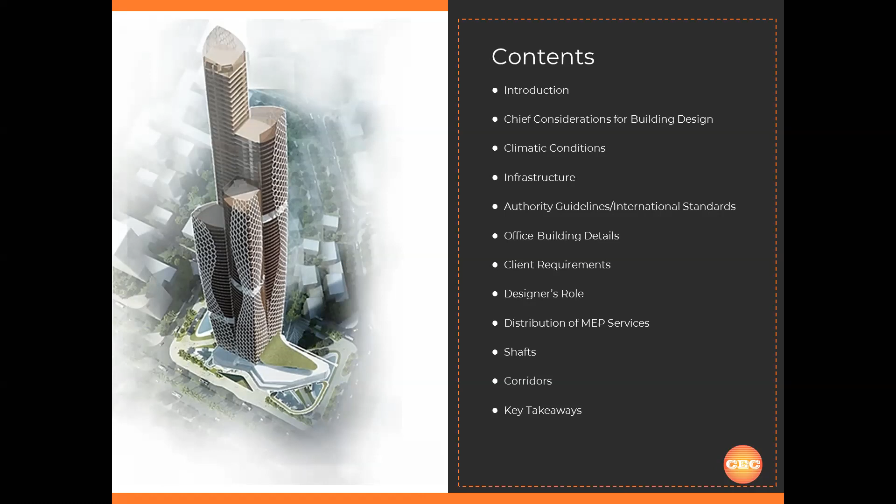MEP will have a vertical distribution, which is floor to floor, and a horizontal distribution, which is from the corridor to individual office spaces. And then a conclusion. So this will be the broad scenario of the whole presentation.

As we are saying, apart from architectural and structural, everything else in MEP is interactive. It is meant to suit the purpose of the occupant and end user. Let it be lighting: if the requirement is detailed work, then we have more lighting. To have comfort for the occupant, we need air conditioning, so the temperature should not be too cold or too uncomfortable. Similarly, we are talking about water supplies. Apart from this, requirements like fire and life safety come into the picture, required for occupant safety in case of any accidents. So all these services are covered as part of MEP.

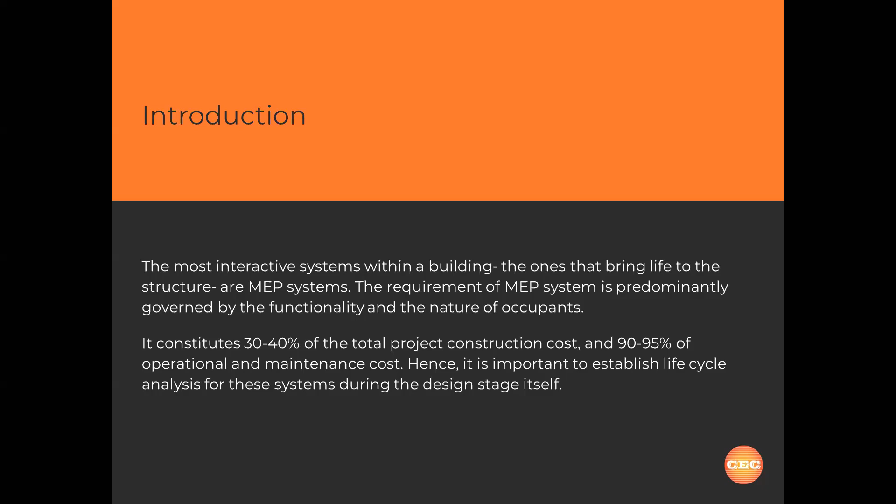By and large, when we evaluate it, MEP contributes about 30 to 40% of the cost of the whole project as the initial cost or cost of construction. When we go further into operation, these costs are about 90 to 95%. So it is important for all stakeholders to understand the selection and implementation of design, how it will work during design and installation, and how it will perform during operation and maintenance. And we are going to cover those aspects one by one as part of the further discussion. As we mentioned, climatic conditions, infrastructure, authority guidelines, and client-specific requirements are the key parameters for the designer's flow.

Taking further to our particular project, Istanbul. Istanbul is just the gateway to Europe. So weather conditions are 28 to 30 degrees centigrade, unlike Dubai, as I was mentioning earlier, where we get temperatures of about 46 to 50 degrees centigrade in the summer. So in such cases, we need AC.

Normally, when we talk air conditioning, we maintain a temperature of about 24 degrees centigrade as a comfortable temperature. So the AC requirement for the offices will be there, which will be required to improve the efficiency of the workers, making them comfortable. But the load or the allocation of AC will be lesser as compared to the Gulf.

Similarly, depending on the latitude and altitude of the site, the orientation of the whole facade will be considered. I believe that's a part of the architectural thing, and you must be looking into it. How can we maximize the sunlight, and how we can create that atmosphere within the spaces. So when we talk about maximizing the daylight, we automatically talk about reducing the artificial dependence on the lighting.

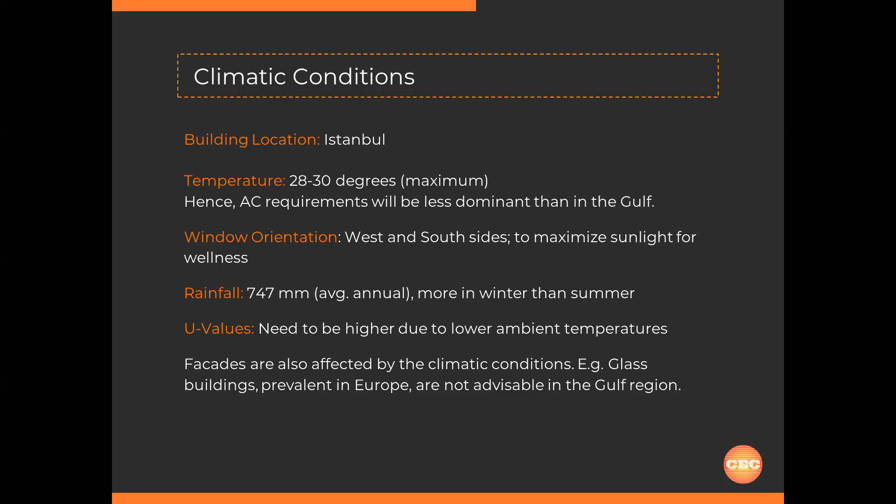Then when we say lighting facades with glass, it also brings the solar energy, which is radiant energy. How can we get more sunlight but less heat? That depends on the selection of the glass. So these are climatic conditions.

At an infrastructure level, how the plot is. Whenever you want to construct the office tower, is it flat? Is it sloping? If it is sloping, then it has to get properly leveled. So plot gradient will come into picture. Allocation of utilities, what sort of infrastructure is available around the plot, from where I am getting the drainage connection, from where I am getting the water supply piping, from where I am getting the telephone lines. So all these things.

In developed countries, there is something called master development. So as a master, each plot is allocated for a specific purpose, and the allocation of services in terms of power, X megawatt, is allocated. So that comes into picture.

Similarly, how much rainwater we can discharge. When there are heavy rains, we cannot flood the infrastructure. So the authorities, the guidelines of the master development, will suggest that we should hold the water for 2-3 hours within the plot and then discharge to the main network to avoid flooding of the spaces. So those norms will come into picture as part of master development.

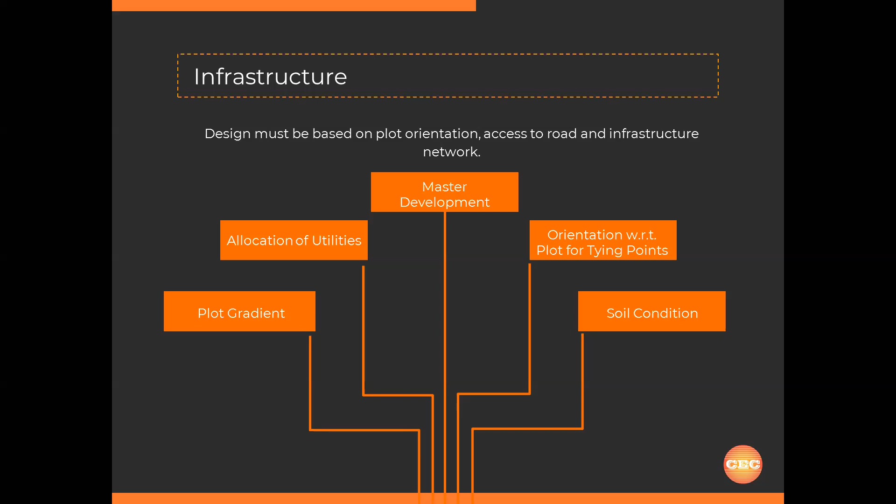Orientation we discussed, and soil condition, very important, how the structure will be there based on soil condition. Again, percolation of rainwater will come into picture. So these are the basic parameters on which the whole design of structure as well as MEP is governed.

Now standards. As we are discussing, for every location we have specific authority guidelines and international standards. So when we are designing, there are four major parameters we work on with the authority. One is authority guidelines and international standards. Second, what is the infrastructure of the authority around the plot? Third, access and safety of maintenance.

At times when we talk about civil defense, they will come and inspect quite regularly for standards. So how they will access, that scenario. If you talk about the power distributor, they have to maintain their transformers and cables, and they do regular inspections. So how can they access the areas?

And the last aspect is billing. The occupants will have two sorts of billing. One is billing from the master developer, and second is from the authorities like electricity and water, as we pay DEWA bills here, as we pay telephone bills here. Similarly, air conditioning is handled at times with district cooling, so those bills come into picture. So these are the aspects we look into when we deal with the authorities.

I just mentioned a few standards which are internationally acceptable for the air conditioning and water supply and the services. I think as a part of architecture, you should just get introduced to it. In-depth analysis of this is not required. But the second part for sure is required for you people, that connectivity to infrastructure. At the end of the day, the building has to function along with the periphery it is built within. So road and access to the roads, service entries are the parts which we'll be discussing as a part of your architectural details.

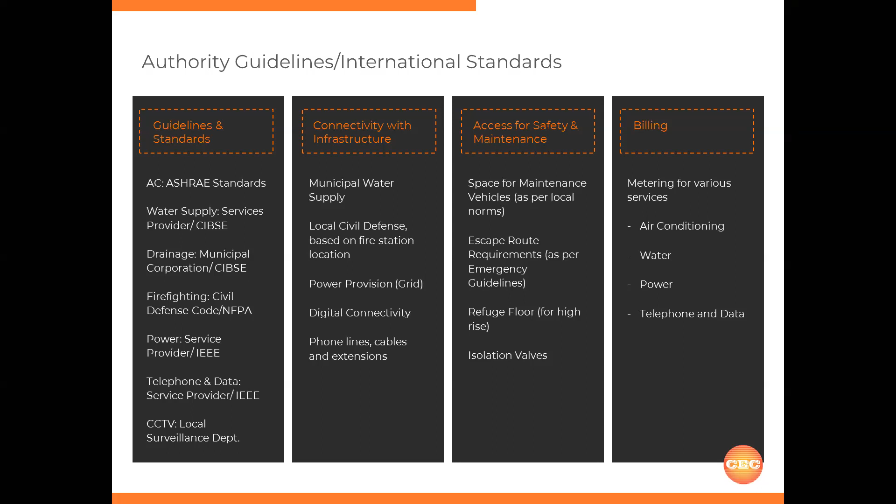Going further, just for example, in the basement we don't provide AC. It is not required because there are no occupants. It's only a car park. So air conditioning will not be applicable. Water supply will not be applicable. But firefighting has to be there. We need to have power supply. Telephone data, we don't have the points, but the network should be there. CCTV is required. So each area of the building is analyzed for the services it needs.

In services design, we get connection from the infrastructure at one certain point, which we call a main center. From that main center, services are distributed to intermediate points, and from there it goes to the end user. How it happens for all services we will go through one by one.

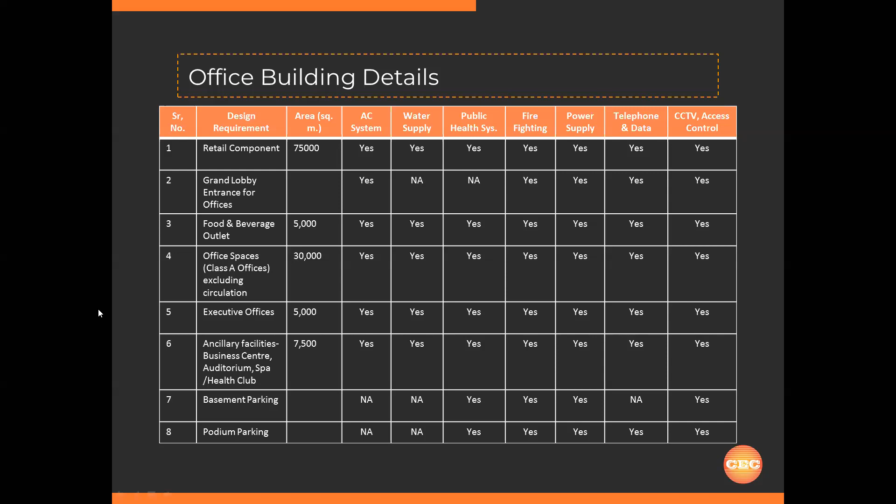When we talk about designing services for a project, these are the few aspects we ask the client. Who is the target customer? Looking at the facade of the building, we analyze this could be a high income group, where we are talking about sophisticated offices. Now, are the offices in sell mode or lease mode?

These differences go with the billing, because in case of lease mode, the tenant is paying for the premises lease, and all common utilities like elevator, corridor air conditioning, maintenance of FMC are loaded on the rentals. So that component has to be evaluated and notified to the building operators, so that the lease of the space is decided accordingly. So we ask fundamentally this question.

Then what is the building height? Normally we keep the pressures in the building less than 10 to 12 bar. Beyond that, it becomes difficult to handle. It's dangerous. So when we say 10 to 12 bar pressure, the height correlates to almost 100 to 120 meters. Now, the notification says that 180 meters is the building height. That means we need to break the pressure.

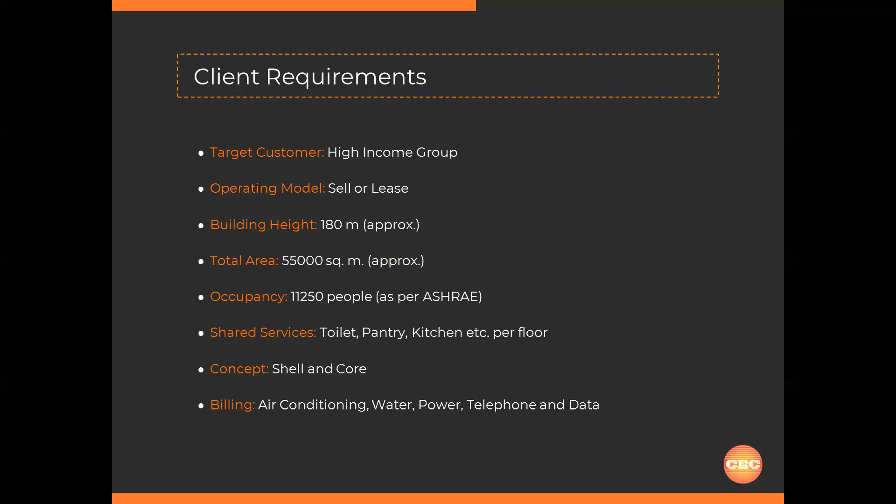Okay. Second aspect is a completely furnished office, where the end user will come and just plug and play. Everything will be available as part of the false ceiling and flooring. Only the loose furniture he will provide as per his requirement. So which route he would like to go as a developer is what we will further discuss.

Again, the client requirements are evaluated, what he needs as services in the building. Standard things, air conditioning, water supply, drainage are the requirements of the end user. Fire protection and fire alarm is by the authorities. Power and telephone data is again for the end user. CCTV and access control can be required either by authority or by surveillance for the safety of the building.

So similarly, we have other aspects. Do you want gas? Is there any specific requirement? Do we have a gym or swimming pool? So those requirements will come into picture. There are standards like well building. I'm not sure we are aware of it now.

As we talk about green building, where we talk about sustainability, there is something called well building standards, where we talk about the comfort, mental happiness of the occupants. So when such things come into picture, they talk about fitness and well-being of the building occupants. In that case, we need to provide the gym facility, rest facilities, the washing facilities or the shower facilities. All these aspects will come into picture. So it all depends what the client is trying to accommodate in the building as a part of standards.

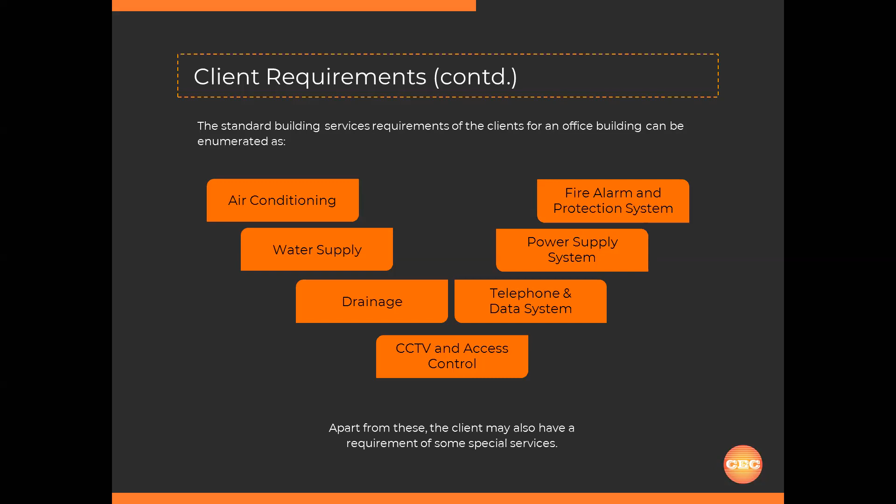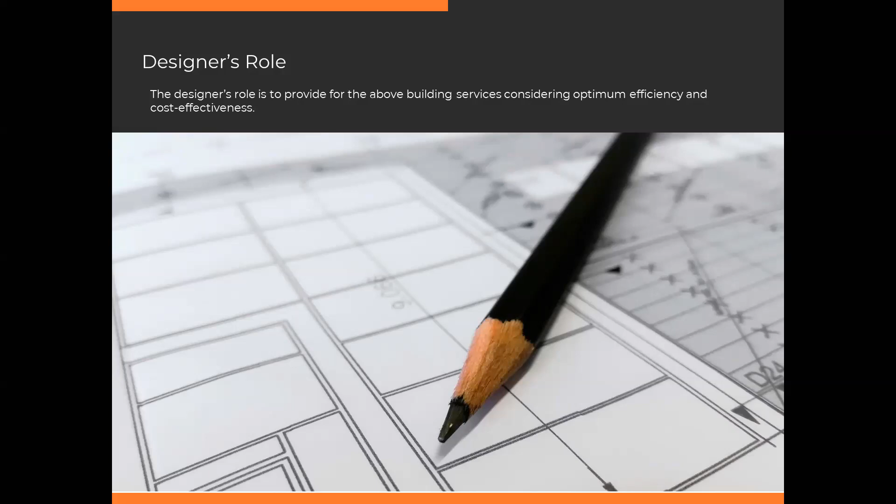Once we get the basic information, what exactly is the building, how is the use, how are the occupants, what is the model, then we'll start working on the details. Now, from here, we'll start talking about specific services. Air conditioning. In air conditioning, we can see window AC, split AC, there is something called package unit, there is new technology of VRF and chillers. So when to use what?

Basically, as a thumb rule, anything which goes beyond 1000 ton, we use the chiller system. Now, how should we correlate this? That capacity is more or less proportional to the area and climatic conditions. Say in Dubai, we have a house or a space of 1000 square feet. For 1000 square feet in Dubai, we'll need say 5 ton or 5 TR as a load. But the same 1000 square feet, if I have an office in Istanbul, I will need only 3 ton or 2.5 ton, half the capacity, because we don't have extreme conditions. For Istanbul climatic conditions, we anticipate almost 350 square feet per ton.

So looking at the total built up area of say 55,000 square meters, we are talking about more than 1000 ton as the cooling load. The approximate calculation is about 3000 ton. The split units or window ACs available are in the range of about 3 to 5 ton. So we cannot have 1000 units installed on the roof with the piping of 1000 units, cabling of 1000 units. It's practically impossible. So the system adopted for such scenarios is a chiller system where we have high capacity chillers of 1000 ton, 2 or 3 chillers. There will be cooling towers on top, and heat from the space is taken out and released to the atmosphere.

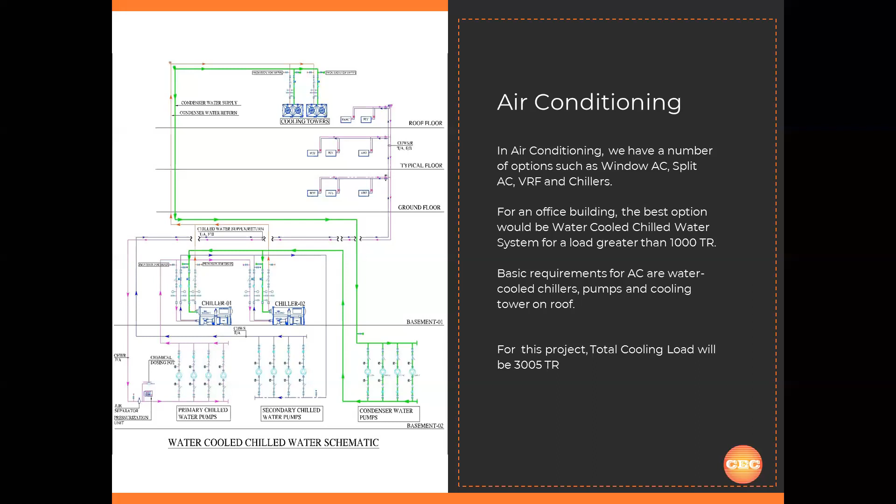Water supply, same thing. We cannot pump the water directly to the roof of a high-rise tower. So whatever municipal network is there, which is connected to the underground tank, the capacities are established based on the occupancy and consumption. Like for residentials, we have a high water consumption because we use it for multiple purposes, for cooking, for bath. In offices, that consumption is on the lesser side.

So the water will come from the infrastructure to the underground tank. It will be pumped to the overhead tank with a pump. So we'll be having an overhead tank. The fundamental thing for operation, it becomes easier that only the top 4 floors will be using booster pumps, and the remaining floors, say about 100 meters or 120 meters, will be utilized with gravity for the pressure.

Generally, in most of the countries, the standard is we should have minimum 1 day storage in the underground tank and half a day storage in the overhead tank. If we size the overhead tank on a higher size, the structure becomes heavy because water has a heavy load. 1 cubic meter of water, the load is about 1000 kg. So the structure becomes heavy. So half a day storage is kept on the roof and the remaining is in the underground storage.

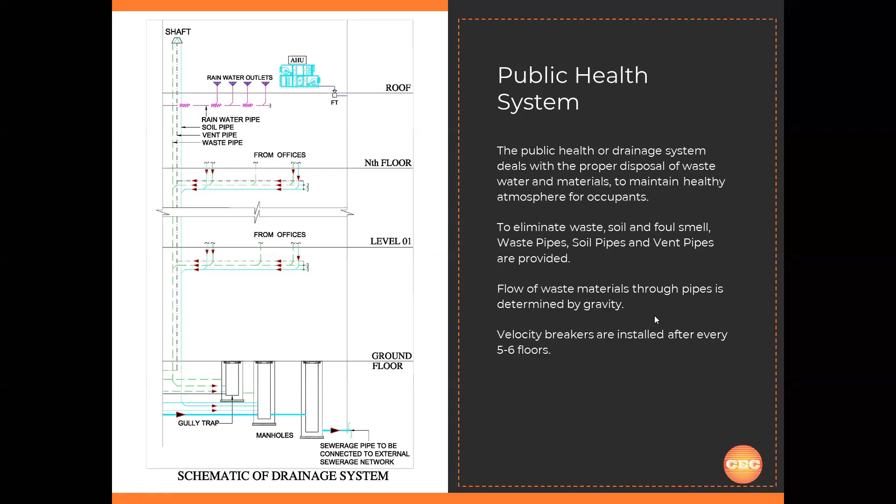Now, this is not a day-to-day utilized system, but this is for life safety and mandated by all the civil defense regulations. The famous standard all over the world is NFPA, which we say as National Fire Protection Association, worldwide used. It is an American standard and is followed by most of the countries in the world.

Here again, we'll be having a tank in the basement, and with the pumps, it will be distributed to the sprinklers. It will be connected to the hose reel, which we say as a cabinet, which the occupants will use. And there's something called a landing valve. So in case the mishap is to a larger extent and the external agencies of the civil defense come into picture, they are authorized to use the landing valve, and they will connect their fire tank or their vehicle with the breeching inlets.

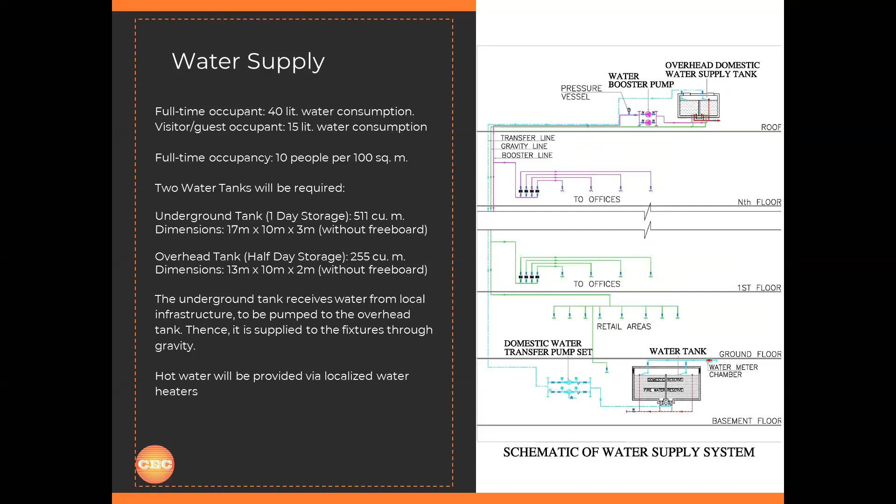It has a very high demand of water requirement because in case of accidents, the consumption of water is very, very high. So as compared to the domestic consumption, it will be more or less the same, or it will be more. If you look at the consumption of water for domestic, it is 255 for half a day, while the fire demand is about 227. So it's a huge water demand which is required.

About timings, it depends on authority regulations and location of the fire station. If the fire stations are nearby, then storage capacity can come down. Again, this we have to discuss with the local authority to establish what they need.

One is fire protection, second is fire notification. So there are fire alarm systems. In case of fire, the occupants are notified to evacuate. So either there will be an evacuation message, or there will be a sounder system which will give the sound and alarms to the occupants to evacuate.

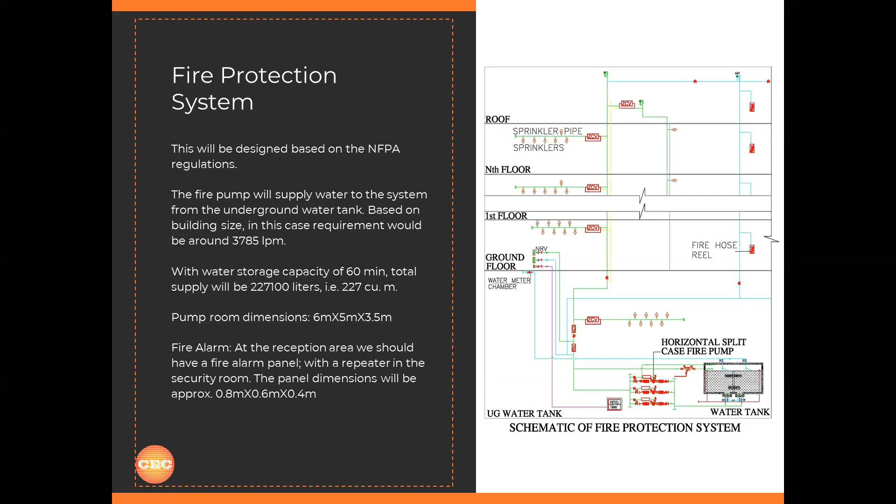Key aspect to move into the whole scenario is power distribution. So power from the services provider. Here we talk DEWA, which is a government entity, but at different locations you could have private players who will give the power distribution. Again, we evaluate the total power required.

From infrastructure, it will come to a place called RMU, which is called ring main unit. When we talk such a big development, the power comes from two sources and is connected at RMU level. When you say ring main unit, even if there is a problem in one source, at least the second source will keep on feeding the power to the building. So during construction, during any accident, if one part fails, still the buildings are not affected for the power distribution.

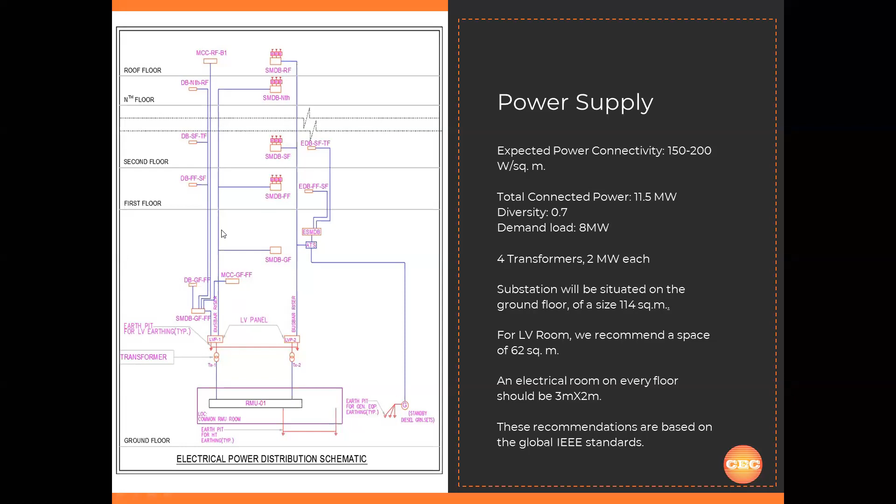Same thing, telephone and data. Here we have Etisalat and Du. They will provide the services at the center level. Normally, this is called main distribution frame, and space required for this is about 3 meter by 3 meter. With current technology, we get telephone, data, plus GSM, and now CATV systems, which is e-vision. Everything comes on a common backbone, and space required for this at ground floor is normally 3 meter by 3 meter. From this, vertically it goes to every floor through the shaft.

Then we have IDF, which is intermediate distribution frame, and from there horizontally it goes to each office space or each end user.

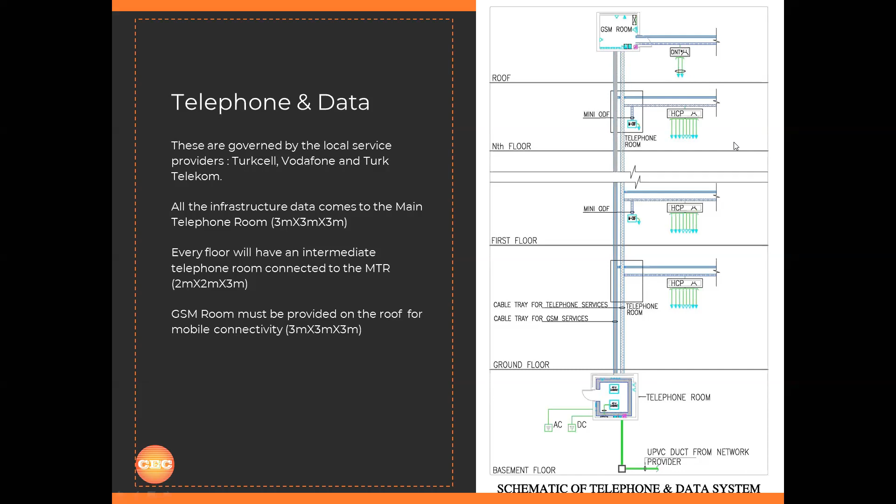Access control, again, there are two types. One is permanent occupants of the building, who are the employees. Second are the visitors. So how can we segregate their entries? How can we handle visitors separately with the security check? So for that, there will be access points, gate barriers, access cards. We can have swipe cards, proximity cards, or biometric access systems.

Apart from access control, another important aspect is the security systems, which is CCTV. One is the surveillance and monitoring system, which is required by the developer. At times, government or the police also need the data to monitor proper surveillance, which will be interfaced with the authority under jurisdiction. So that interface has to be developed. Talking about Dubai, all public areas, common lobbies, corridors, elevators are monitored by Dubai police.

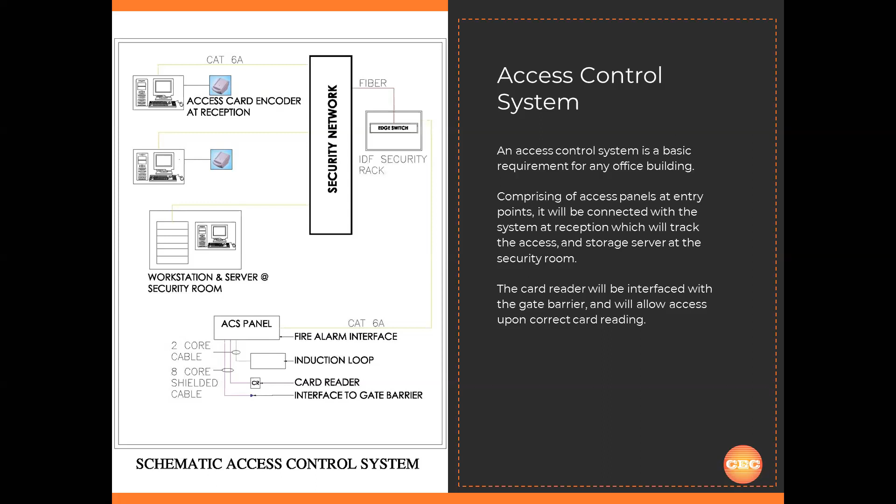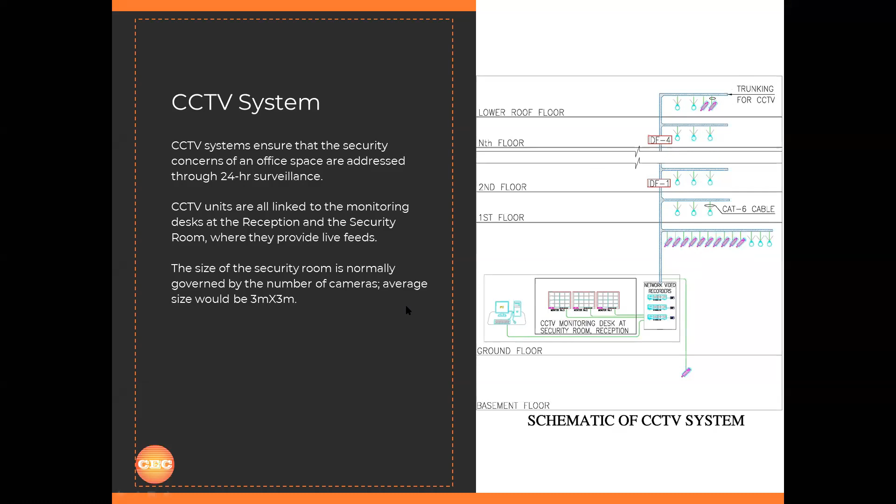When we talk about vertical distribution, for the air conditioning we need to have chilled water pipes, we need to have ducts. For water transfer, we need to have pipes. Vertical public health, we are talking about three pipes, which is soil pipe, waste pipe, and vent pipe. For electrical, we need shafts.

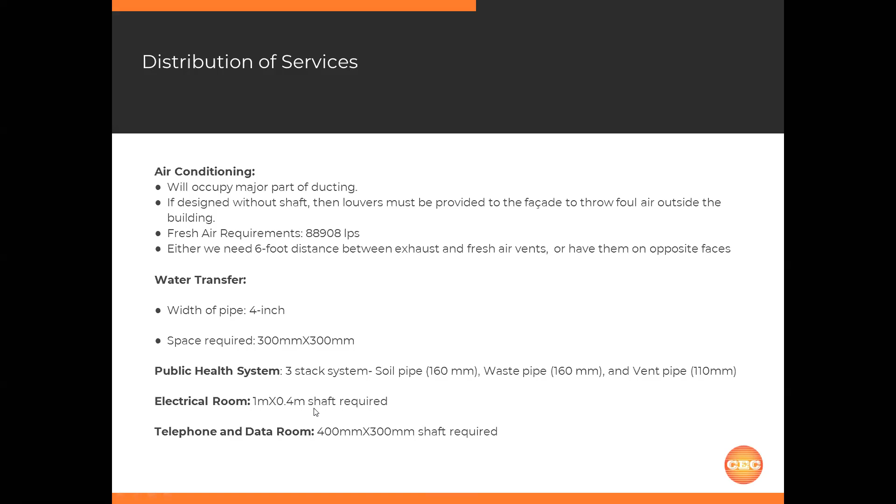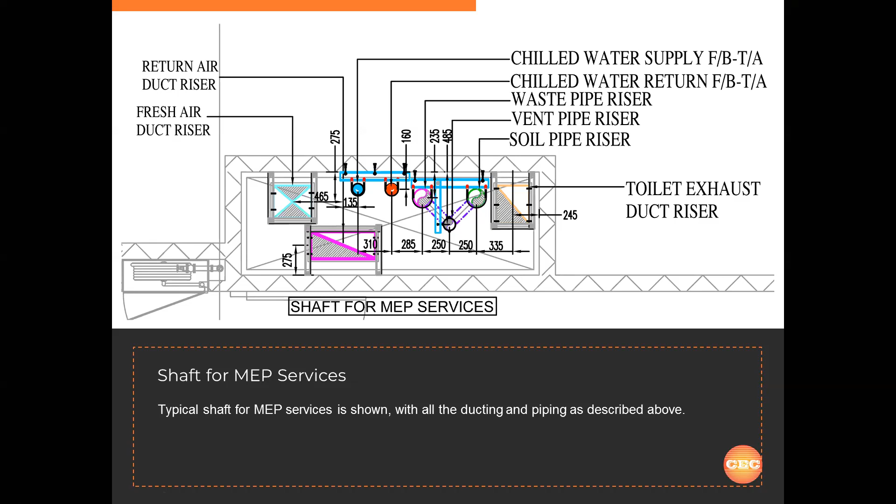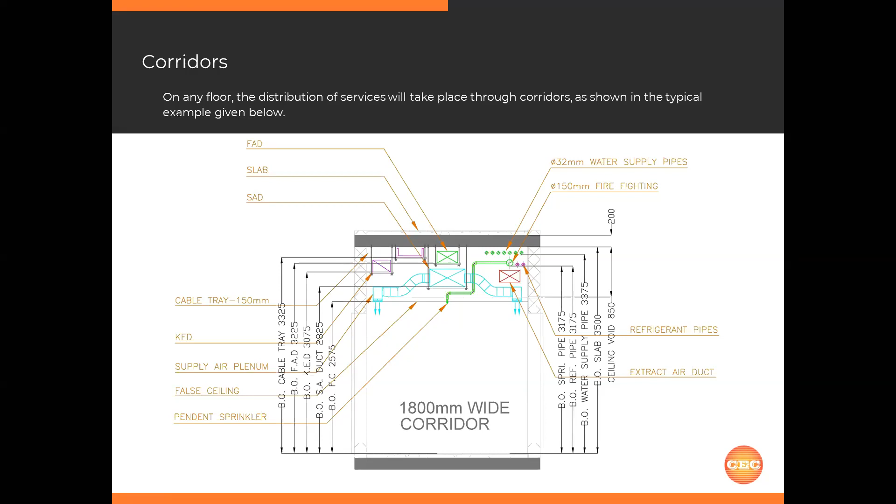This is what the distribution will be from a typical corridor. All services like ducting, chilled water piping, water supply, firefighting, get distributed. Predominantly, if the corridor width is 1.8 meter, the services space required is around 600 to 700 mm. If we reduce the corridor width to 1.2, then the height increases a little bit. This typically goes into the distribution ratio of the floor to floor height. Architects need to have maximum height for their aspect ratio, etc. So the floor height is governed by the services and the height the architect is looking for.

So key takeaways. MEP systems are the functional systems. They are the interactive systems. Hence, it's crucial. It is very important to analyze the operations and how it will be handled post-construction, and those aspects need to get plugged in. The architect is not going into the depth of the MEP design, but they should at least understand how the services are getting distributed, and they have to engage the specialist to get the inputs.

The project is the outcome of all stakeholders working together. So proper dialogue, understanding of these systems, and coordination are the key aspects for a successful project.